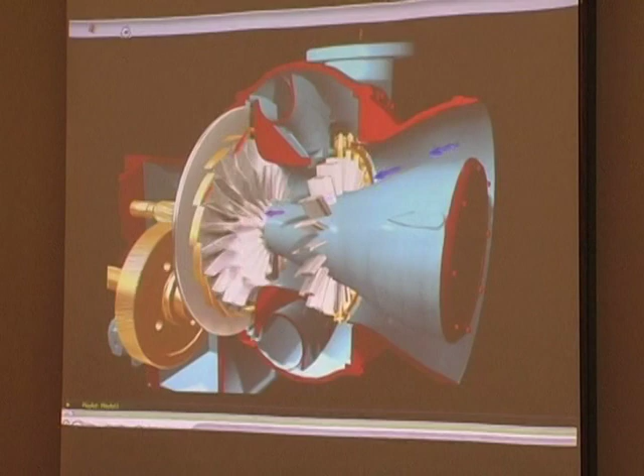We're about the Turblex blowers. I don't know how much you guys have looked at them. This animation probably will answer a lot of questions right off the bat on how they work. The uniqueness of our blowers is that we can vary the output and maintain efficiency. Most blowers, either you would restrict the output with a valve where you're wasting energy that's deadheaded, or you use variable frequency drive to reduce the speed, and you lose efficiency when you reduce the speed of the motor.

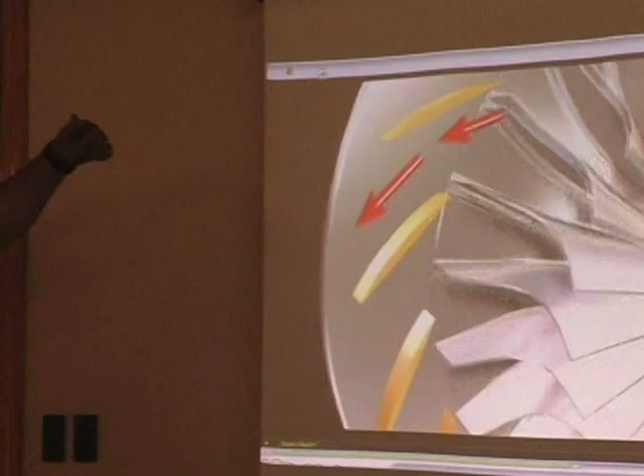Our motor always stays at the nameplate RPM. We vary our airflow by controlling the output through the variable diffusers. They'll be coming up here in a second. These are variable diffusers around the outside. As they open, they'll allow more air to escape into the plenum, which goes to the exhaust.

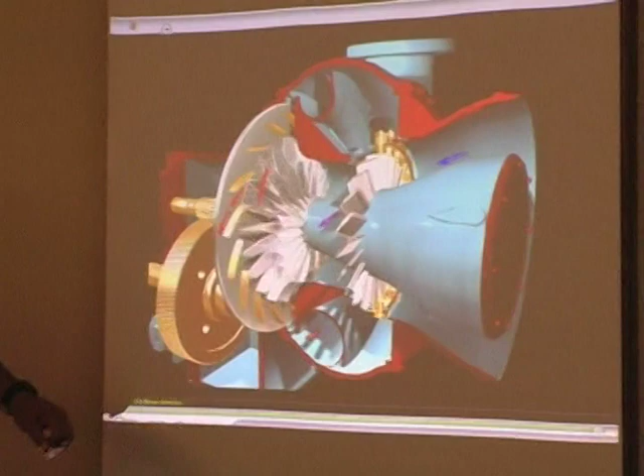When you reduce this airflow, the airflow out, you still can develop more head pressure than you would like. To control or reduce the amount of the air coming in, we have inlet guide vanes, which are here. Those are what give you the efficiency. The VDs, the variable diffusers around the outside, control the output, and based on their position and some other parameters, these inlet guide vanes will control the amount of air coming in to get a maximum efficiency.

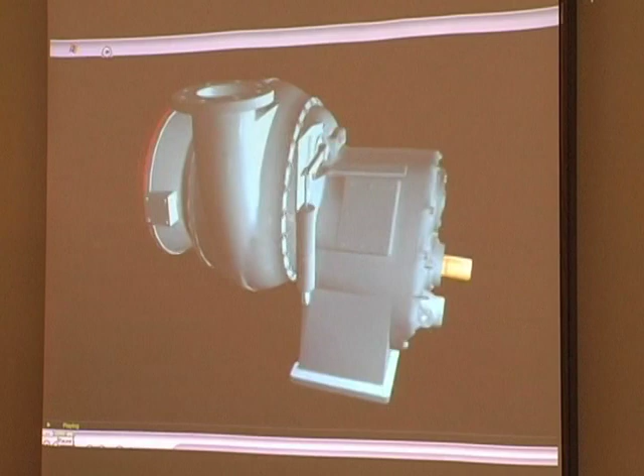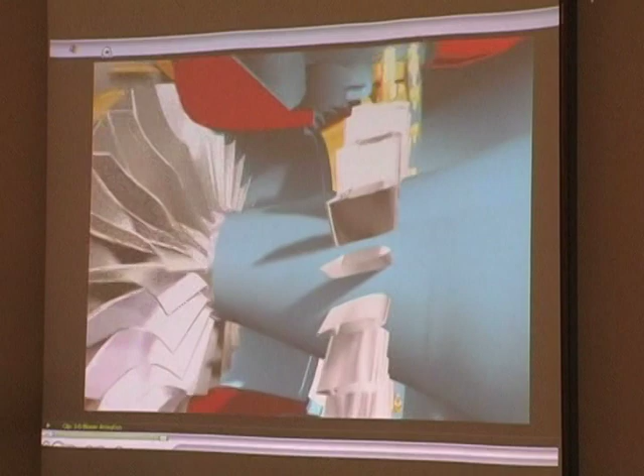Is that all based on static pressure? How those open and close? No, the variable diffusers, which control your output, will base their percentage of output on what you ask of it. When you're operating this, there's a scale from 45 to 100%, and by adjusting their opening, you control what you want out. Now, whether you're running in flow control or pressure control, that's up to you, and that's going to be determined by your SCADA. Your SCADA system is going to send us more or less air, and we will react accordingly to that. Does that answer your question?

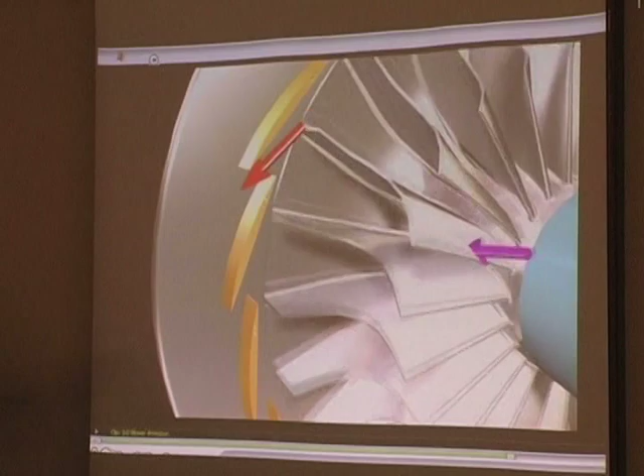As I said, these open based on a percentage. If they're open, say at 75%, and you set them at that in the morning, like this morning, it's 70 degrees out, and you need X amount of air, you set those at 75%. You come back at 3 in the afternoon, and it's now 85 degrees outside. It's going to take more air in to give you that same air out. Air is denser when it's cold.

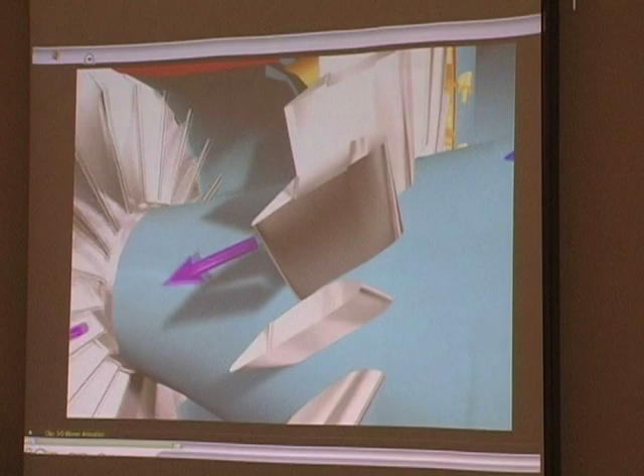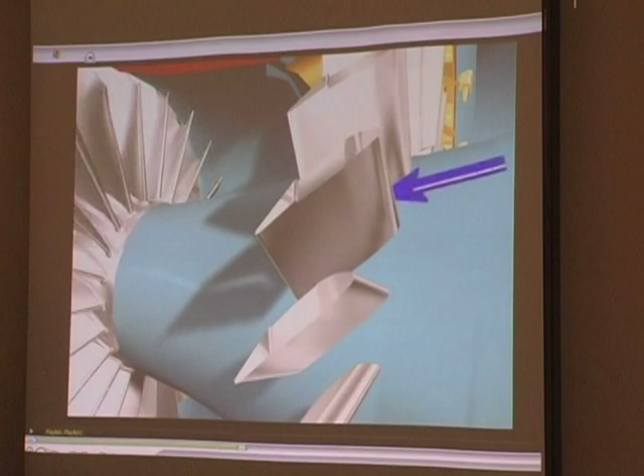So based on where the diffusers are set, the air temperature, and the pressure of the system, there is a subroutine in the program, the PLC, that calculates where to open the IGVs to. And that subroutine will maintain the maximum efficiency. It's a turbine blower, as you can see. These inlet guide vanes also serve the function as they close, they pre-rotate the air.

So that's all going to be programmed in the SCADA system, as far as opening of those diffusers? No, that's all programmed at the blower itself. That's part of our subroutine. Okay. So that'll do that if you're running in local mode or remote, no matter what. There's a program that they have, and then when we get the blowers from Germany, they've been pre-ran and they have numbers from when they're running. Those numbers get punched into the program.

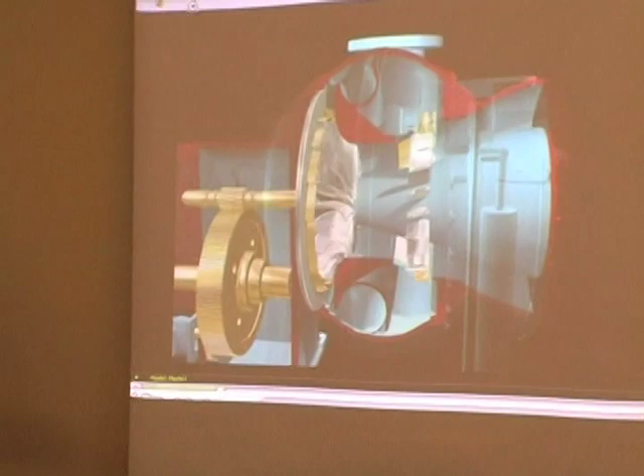So of your 4 blowers here, you could have them all set at the same amount of output, and they might have differences in where the inlet guide vanes would go to. The blowers will run, as I said, from 45 to 100%. 45 is as low as we can go. If you try to go lower than that, the blower can surge, and we'll talk more about surging a little bit later.

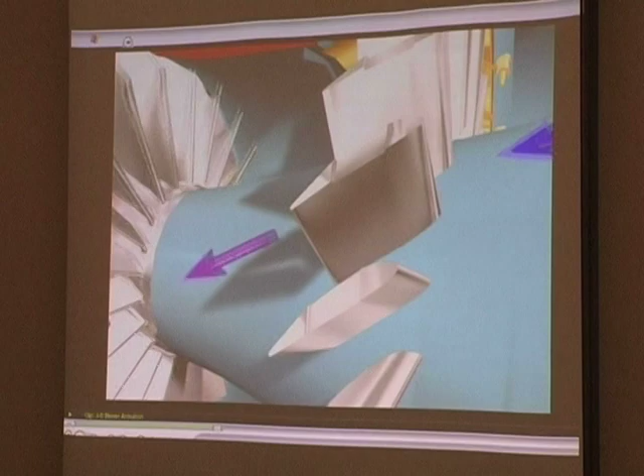The way your system will work is one blower will start, and it will go all the way up to 100%. If it reaches 100% and it still hasn't met what the SCADA system is asking for air, it will reduce that blower back down to 45%. It will start a second blower, and then it will bring both of those blowers up in parallel until it reaches the airflow that it wants.

If it still hasn't reached that, it will then bring both those 2 blowers back down to 45%, start a third and bring the 3 up at the same time, if that was needed. I don't know what your system requirements are. I don't think that you'll be running more than 2 at a time, but that, I don't know.

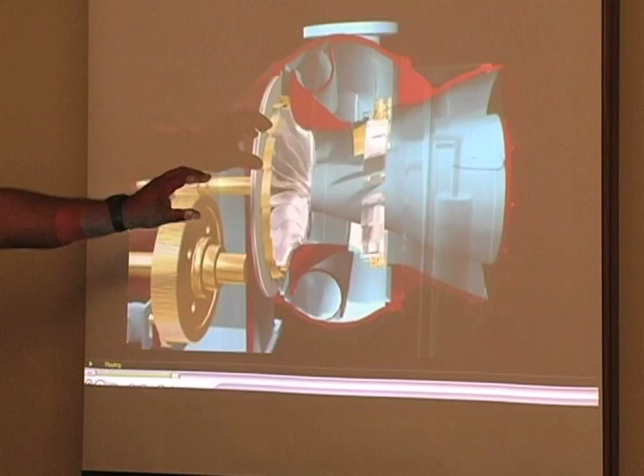We have a bull gear. This is connected to the motor. The motor turns the bull gear. You'll notice from the picture when it comes back right now, the gear on it is large, and the shaft on the top has a smaller gear. We're speeding up this turbine. It also reverses the rotation of it.

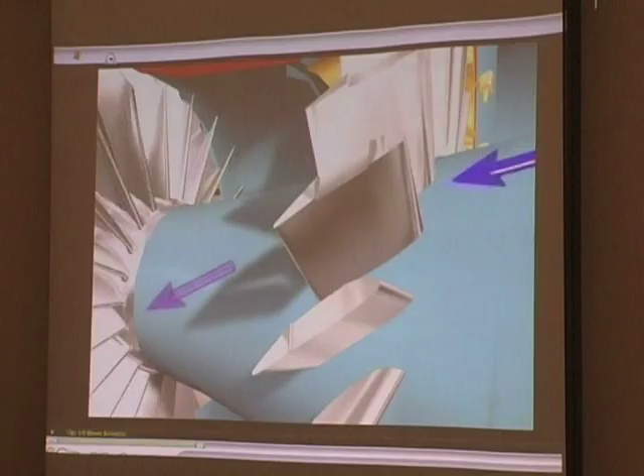Just a little background on Turblex. Formed in 1989, Guy Mace, president. This tenure will be over in October. You see on the bottom, Turblex was purchased by Siemens in November of '06. As of the 1st of this year, it became official part of Siemens. That's pretty much the only thing that's changed so far.

The turbine, the blower part itself, is bought from Denmark. It's bought from HV Turbo of Denmark. We get that in, we build the skid, put on the motor, all the controls. We do keep pretty much all parts in stock. Can be shipped within 24 hours. Located in Springfield, Missouri. And we do have support 24/7.

Those 2 numbers should get you to somebody, or a number to get a hold of somebody if you have an emergency. Those numbers, I don't know if they'll be in your packets, but they will be in the O&M manual. I don't know who'll end up with the O&M manual, but pretty much any questions you have, I'd suggest looking through it first. It has just about every piece of information that you need to know about the blower.

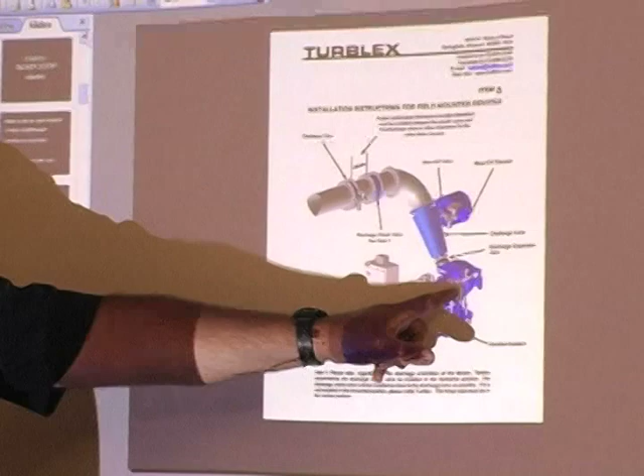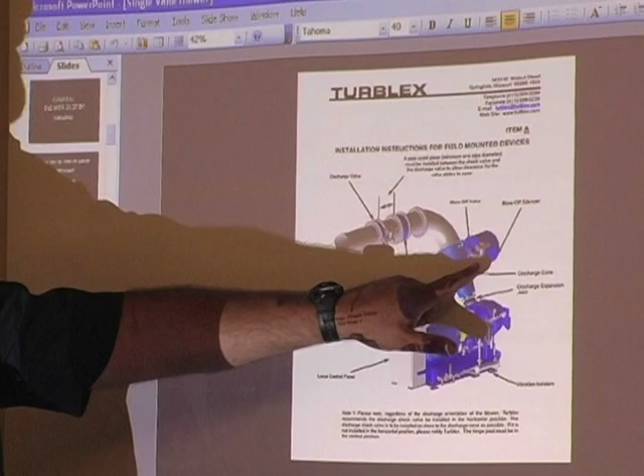This is a basic drawing of a system. You have a local control panel. This is where all your relays, your PLC, all tie in, where you can actually control the blower from locally. You have the motor, the blower itself, the big round part here, and the gearbox, discharge cone. We have a blow-off valve, a blow-off silencer. We also have a check valve and a discharge valve.

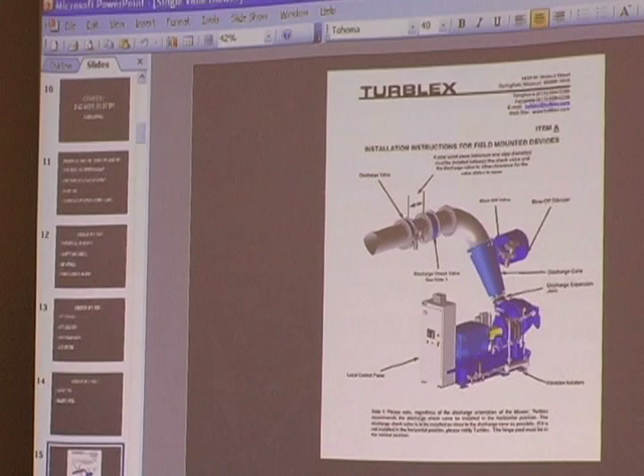When you are ready to start this blower, or when it is sitting idle, there are certain conditions that it will want to be in. And if you go to press the start button and these conditions aren't met, it's not going to let you start. And it will tell you when you try to start it what it is not happy with.

One of the conditions is that the blow-off valve has to be open. When we start the blower, we don't want to start it into a completely closed system. We have to have a place for the air to go. So we will have the blow-off valve open. The air pressure you create will go through that valve into the atmosphere. At the time that you start it, the discharge valve will be closed.

We have the inlet guide vanes and the diffuser vanes, which will both need to be at their minimum position. So if there's a problem with those and they're stuck somewhere, you're not going to be allowed to start. Is that done through SCADA, or do you go to manual? This is all in our local control panel.

So you don't have to open the valve, close this one? No, it'll do this for you. It's all automated, yeah. Blow-off valve. Yep. And everything I'm telling you right now, the blower's gonna do this itself. Really, the only thing we're gonna get from SCADA is more or less air. That's the only thing we're gonna get from there.

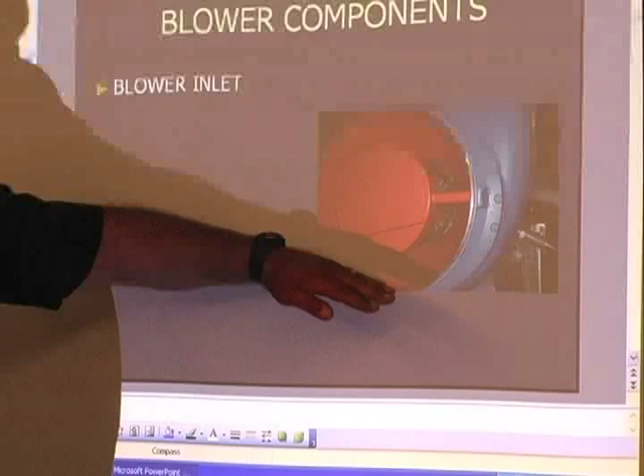This is something you probably won't see unless you're around for a tear down. This is what the inlet portion of the blower looks like. Usually this is covered by the air filters, the air box. This particular blower shows the inlet and the impeller. This blower does not have the inlet guide vanes on it. The inlet guide vanes will be sitting directly in front of the impeller here, and would sit around it like this. We may have a better picture of that in a minute, I'm not sure.

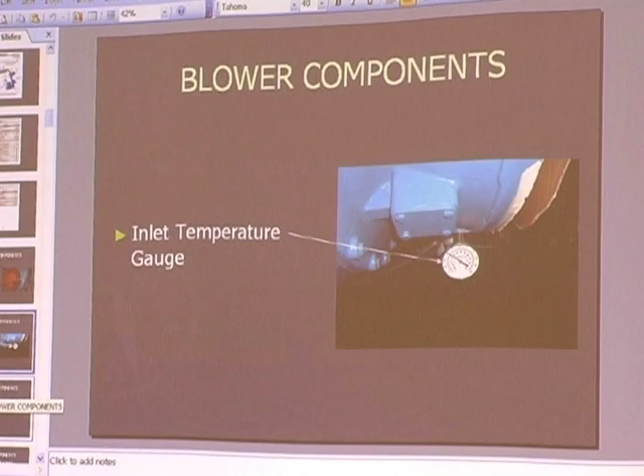We have a manual inlet temperature gauge. This is for visual verification of the air coming in. The inlet air has to stay within a certain temperature parameter, and that's set up on the LCP. I'm not sure exactly what yours is.